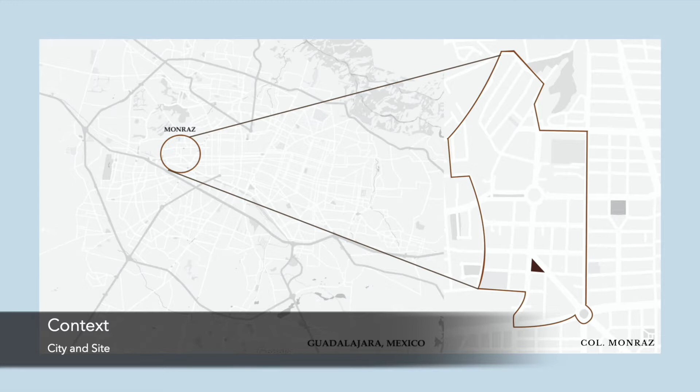The city we chose is Guadalajara because we think it has great potential to explore different architectural areas, given that it is the second largest city in Mexico.

Therefore, the neighborhood we chose is Monraz because it is well connected, safe, and quiet. It belongs to a medium-high class neighborhood. There are restaurants, a clinic, and mainly houses in the immediate context.

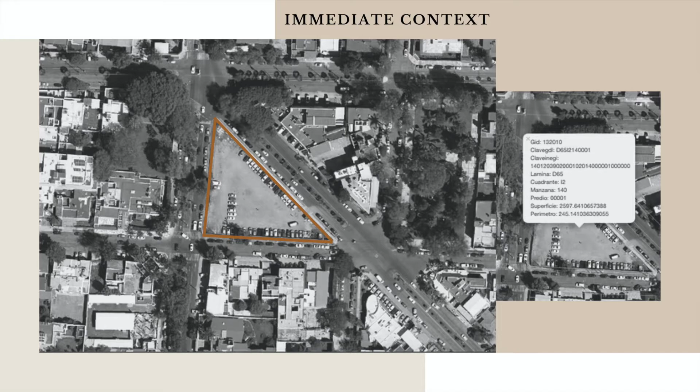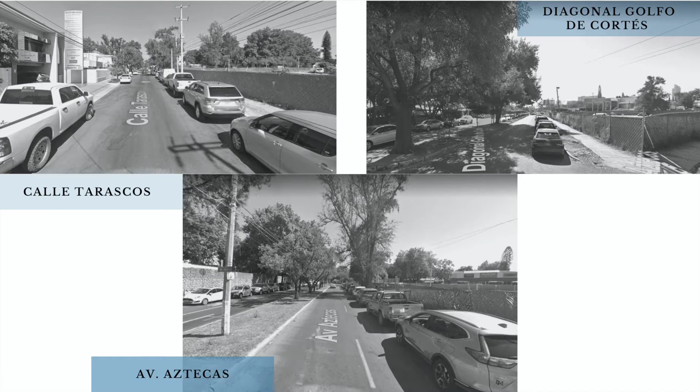Our lot is surrounded by two avenues and one street. The main avenue, Diagonal Golfo de Cortés, is the busiest of the three because there are several restaurants and commercial premises. Calle Tarascos is a one-way street where you can find a clinic, commerce, and houses. Finally, Avenida Aztecas is less busy as it mainly has residential complexes.

Right now, the selected terrain is a public parking lot. That's why we decided to keep half of it for the community.

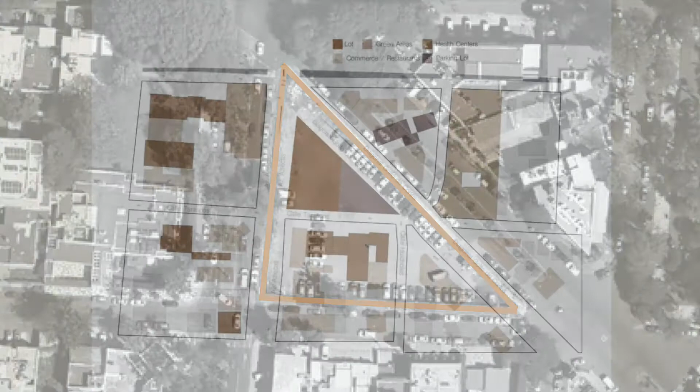As designers and project consultants, we took into consideration the expectations of each member that is going to interact with and be affected in a positive way by the project. Each group has specific concerns and expectations that will influence the development of the center.

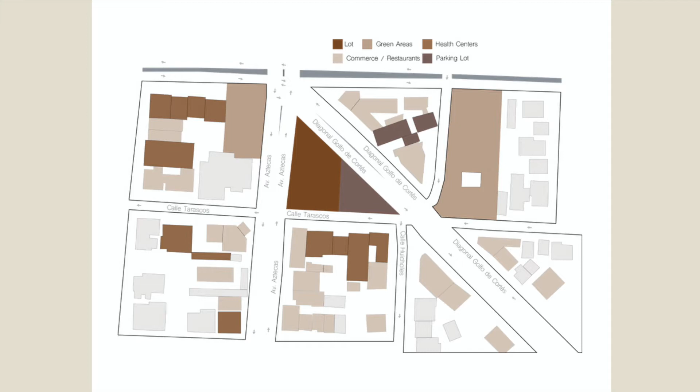Staff is concerned about transport and connectivity, safety, and good workplaces. Users expect constant contact with nature, comfortable spaces, and tranquility. The client's expectations are about budget, profits, and accessibility. And for the community, traffic, context, and environment consideration, as well as enough public services, are important.

It is important to clarify from the beginning that we do not refer to this project as a rehab center. We see this project as a learning and healing center. Definitions and concepts we'll address later on with each proposal.

We shape our space and space shapes us as human beings - Dr. Faza Narasimhan. Isika Center is the vision of what health centers can and should be.

Derived from the word Ikisika in the native Huichol language, which means to teach or learn, Isika Center is categorized as a learning and healing center, where people can learn to live a new life.

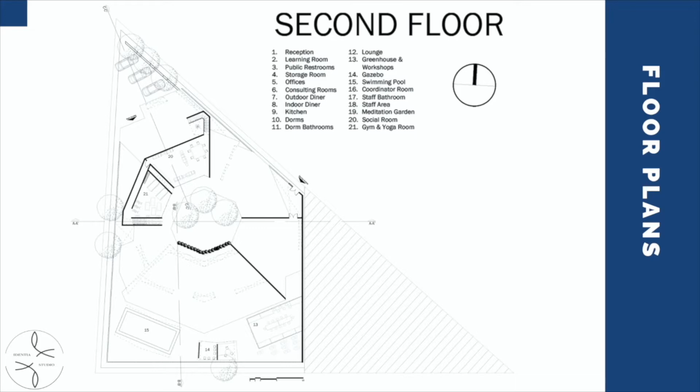The project's proposal is formed by a radial configuration of spaces. This allows the project to have a central garden and therefore create a series of open and closed spaces through an octagonal form. Mainly on one level with few spaces on the second level, the project is divided into four main areas, all designed with proper care and detailing.

Public spaces where outsiders, visitors, and guests will interact, private spaces which users receiving treatment will use, staff areas where only center employees will have access, and finally, green or outdoor areas.

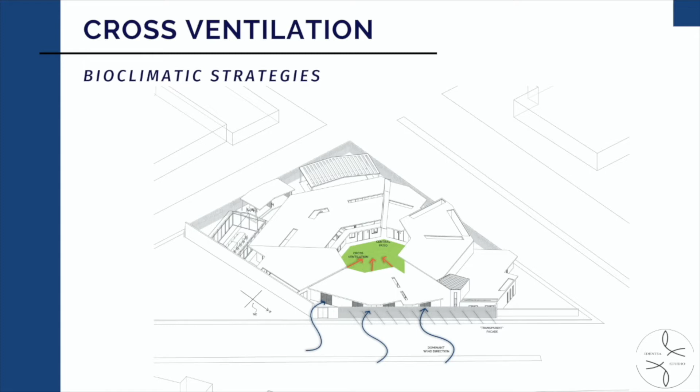With the help of passive bioclimatic strategies, such as cross-ventilation, overhangs, strategies following the sun path like the use of photovoltaic panels, as well as sustainable constructive systems like the use of ceramic blocks in walls and slabs, the project's environmental impact decreases greatly.

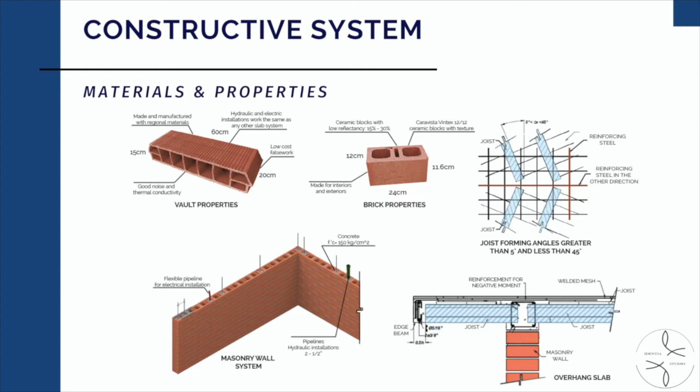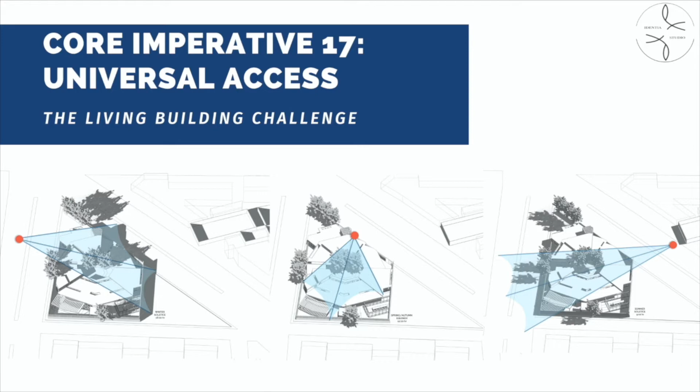As part of the Living Building Challenge, Isika Center implements solutions for most of the imperatives, but places special attention to the 17th core imperative, universal access. The approach to this revolves around sunlight, in which the project will not and cannot cast extreme shadows and block sunlight to neighboring buildings, facades, and rooftops.

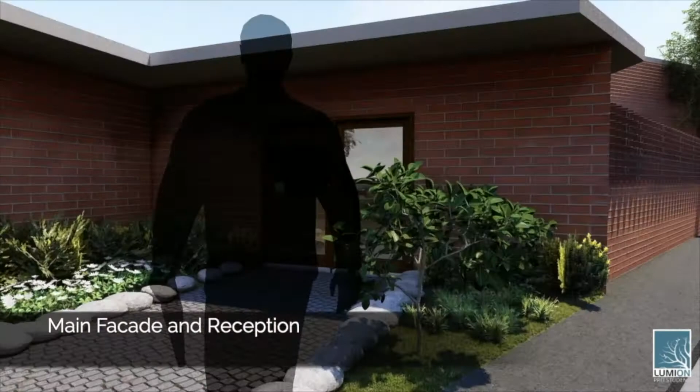As we focus on this proposal, we can see how in some cases the interior space becomes one with the exterior space, without them precisely combining into one.

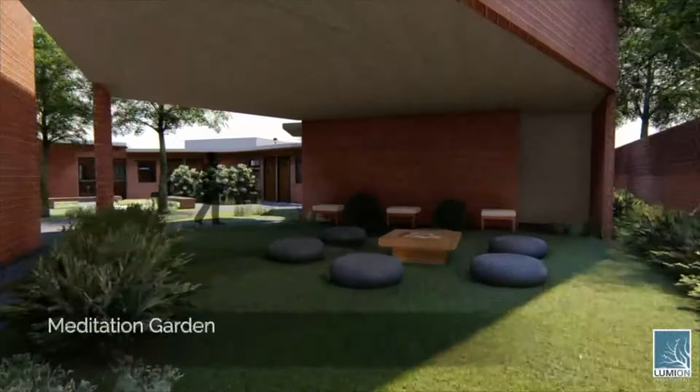The radial configuration of the whole complex creates an interesting circulation within the central garden, a space where users can coexist with nature and have a series of activities outdoors.

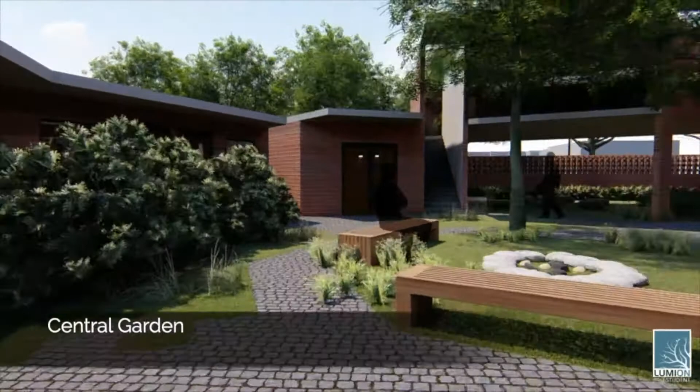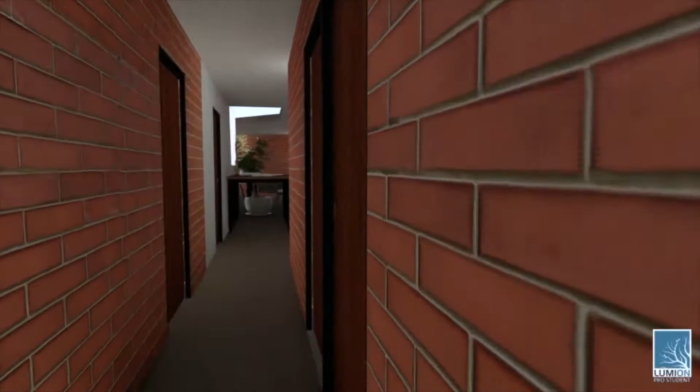This octagonal garden connects all the interior spaces such as the diners, dorms, consulting rooms, offices, the meditation garden, and the learning room, as it accommodates the spaces so that they're comfortable with natural lighting and ventilation, and mainly spaces that can help heal. Using materials like brick, cobblestone, ceramic tiles for interiors, steel, and stone...

In addition to the combination of natural elements, the ambience of these spaces becomes lighter and easy to be around.

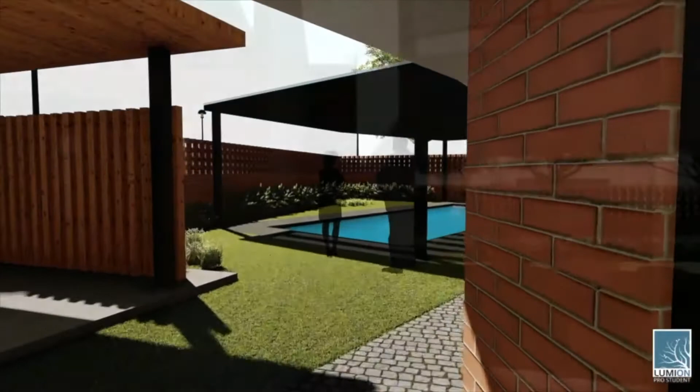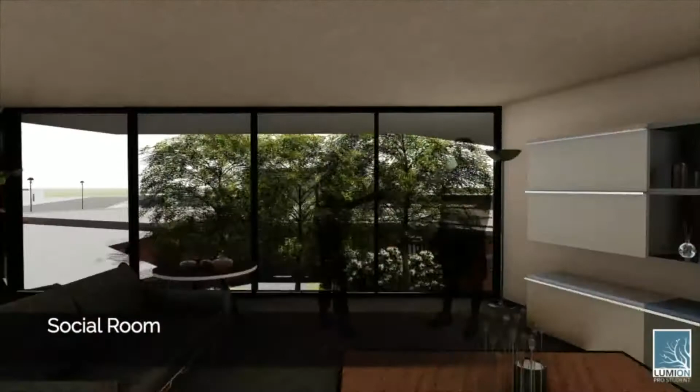It was important for the proposal's development to ensure that the edification wouldn't impact the immediate context in a negative way. This is why the decision to maintain the architectural program at one level as best as possible, as well as having a transparent facade, was necessary - besides the fact that it allows the center to grow in scale if needed in the future.

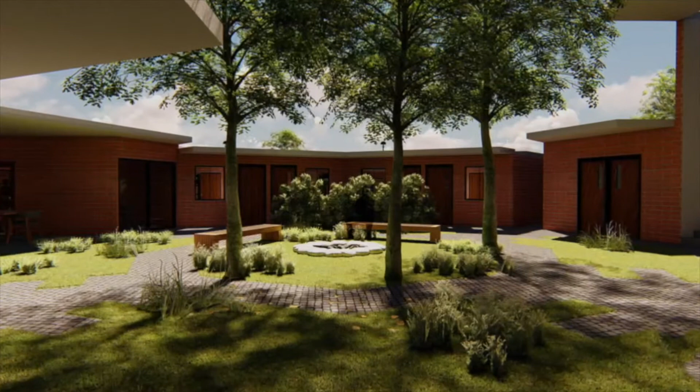With this, let's heal through architecture. This is Isika Center. Look deep into nature, and then you will understand everything better - Albert Einstein.

The second proposal is Renasci Center. The word Renasci comes from the Latin for reborn.

This center is created to be a new concept of health centers in Guadalajara by being a healing and learning center. People can learn how to live a different life by healing with the help of nature.

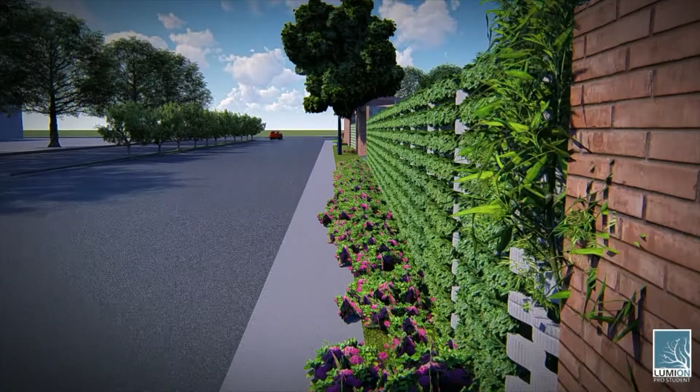The principles from which the design starts are, first, the use of curves to give movement and direction to the outside for the community to interact with the form, and second, focal points where the interior space is developed, dividing public and private space in terms of geometry.

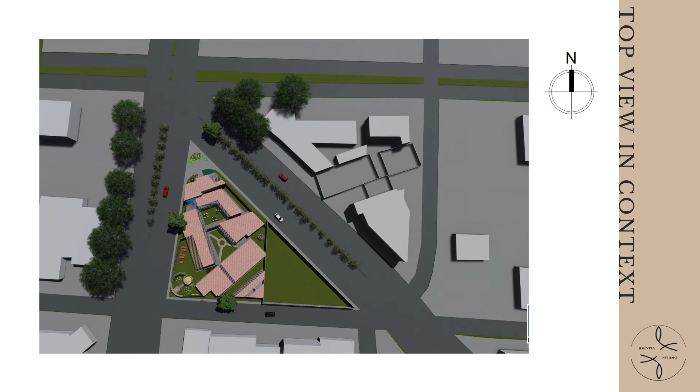All these spaces are separated into three main areas: staff, public, and private. At the entrance you can find public areas, and at the end you can find the most private ones. This is to give privacy to the users and comfort to the people that visit the facilities.

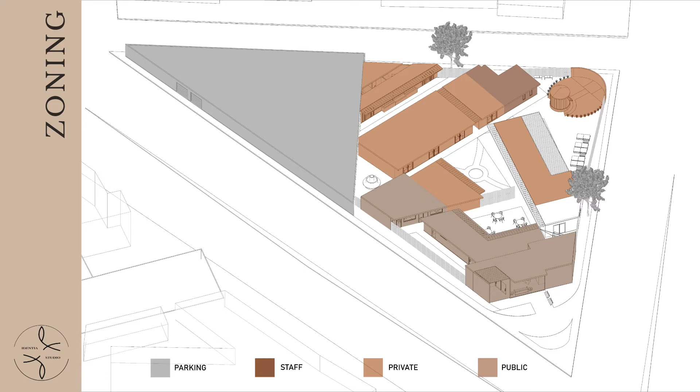The staff area is designed for the people that work in the center, where they can rest and have a private space for themselves only. Each space also has a direct connection with nature, which is very important in the project.

It's also important to have a building that is sustainable and that gives a comfortable experience to the people that use the facilities. That's why it was necessary to consider climate factors such as wind and sun in each season for the project's design.

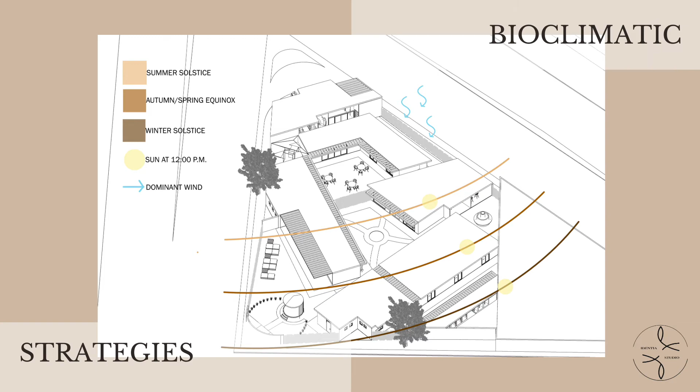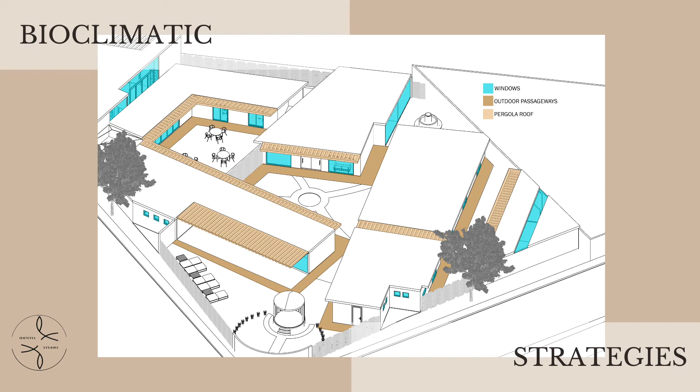The bioclimatic strategies used to achieve that were cantilever roofs or pergolas to cover the sun in summer, and outdoor passageways and cross ventilation to get a highly ventilated environment and discard the use of HVAC systems. The use of sustainable and local materials was also essential in this project, such as ceramic and pumice.

Pumice is a local material that you can get easily in Guadalajara, and it is used for bricks, and ceramic from Nova Ceramic, because this is a sustainable and affordable manufacturer in the city.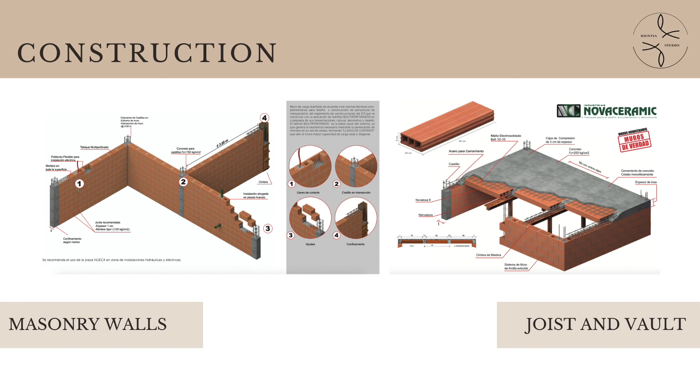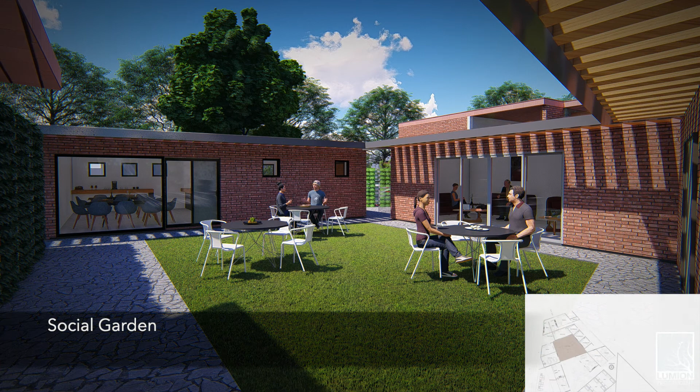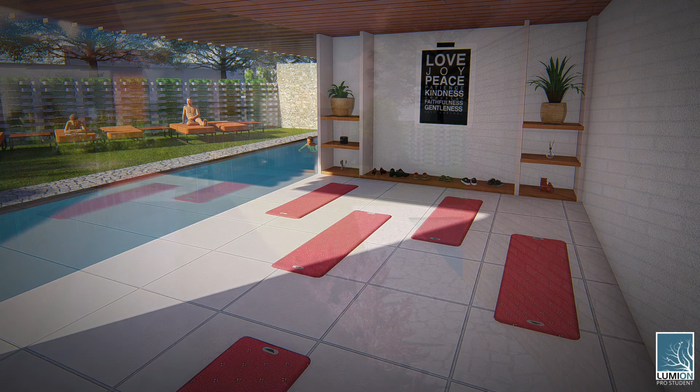Architecture has the power to change people's lives. Therefore, build a place where you don't feel locked inside, but at the same time you can be disconnected from the chaos of the outside, and also have a connection with nature from each interior and exterior space, which helps with the healing process - these were the main goals of the project.